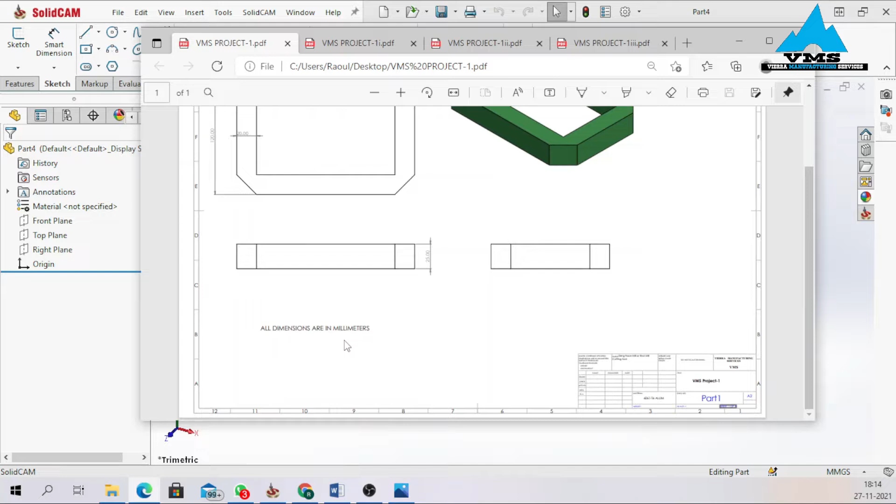Okay, so just click on File, New, Part. Let me just show you guys a drawing. We have about 4 different pages: page 1, page 2, page 3, page 4, up to the final drawing. We are on page 1, making sure all units are in millimeters, and we have a scale of 1 by 1. By the way, all of this will be made available for download.

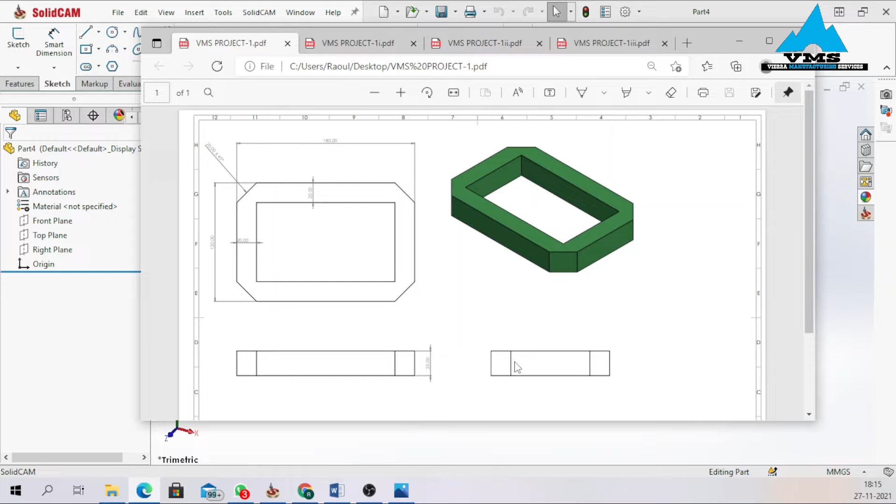So firstly guys, we are going to draw a rectangle of length 180 by 120, then offset it, put chamfers, and then extrude it. So 180 by 120, and make sure your units are in millimeters guys.

Okay, looking at the diagram, we notice that this is third angle representation. So this should be the top view, front view, and this is the side view. We are starting with the top view.

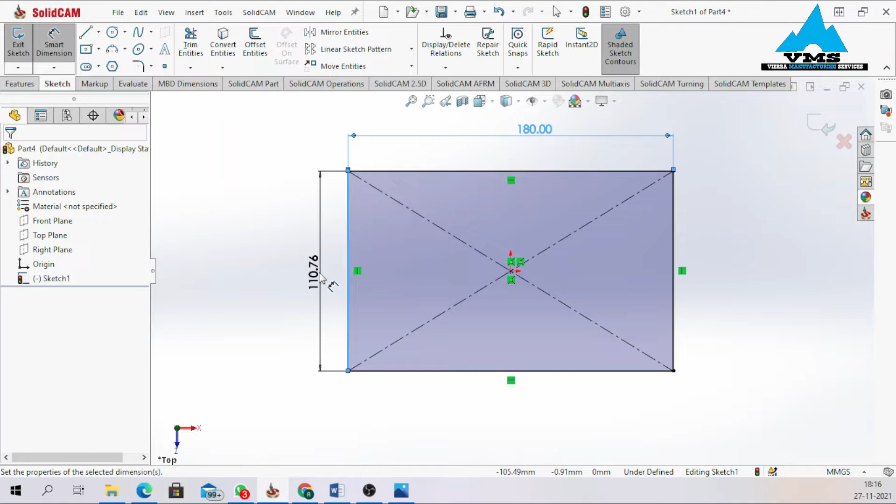Sketch, top, rectangle, center rectangle. Okay, just drag it off. Smart dimension, let's say 180 by 120.

Then offset, let's just select this. It's not selecting, okay, offset of 20 guys. If it's not selecting, select 1 by 1.

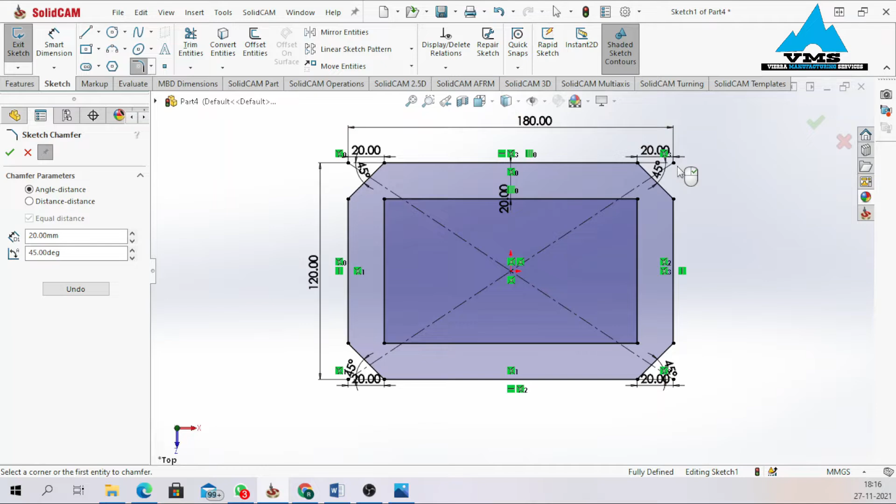All fine, so next thing is putting chamfer. Click on this arrow, chamfer. So the chamfer is angle distance of 20 with an angle of 45. So this edge and this edge, or simply these vertices and these vertices.

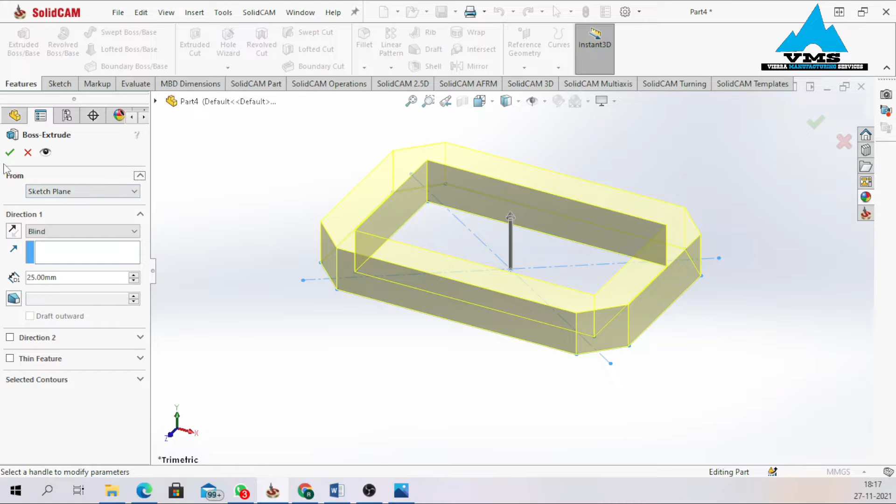Okay, looking at the diagram, we notice that it goes all through, so we have a height of 25. We are going to extrude this by 25. With the sketch selected, feature, extruded boss/base. We extrude it upward by 25. Okay, fine, so first sheet completed guys, beautifully made.

Okay, so next sheet. In the next sheet, what's new is we have this base and this particular extrusion. From here to here it's 2, and as you notice, everywhere is 2.

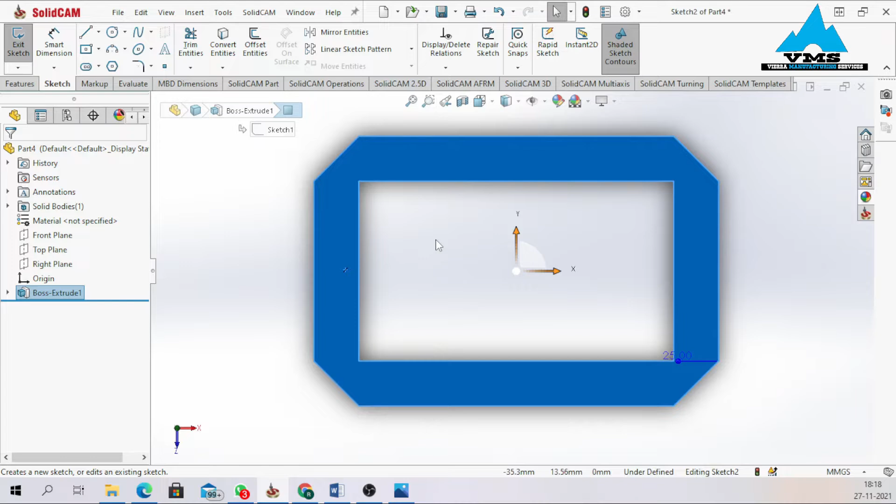So we are going to offset the inner circle, or the inner rectangle, by 2. Then we have a line from here to here of 10 and from here to here of 12. Okay, let's do this.

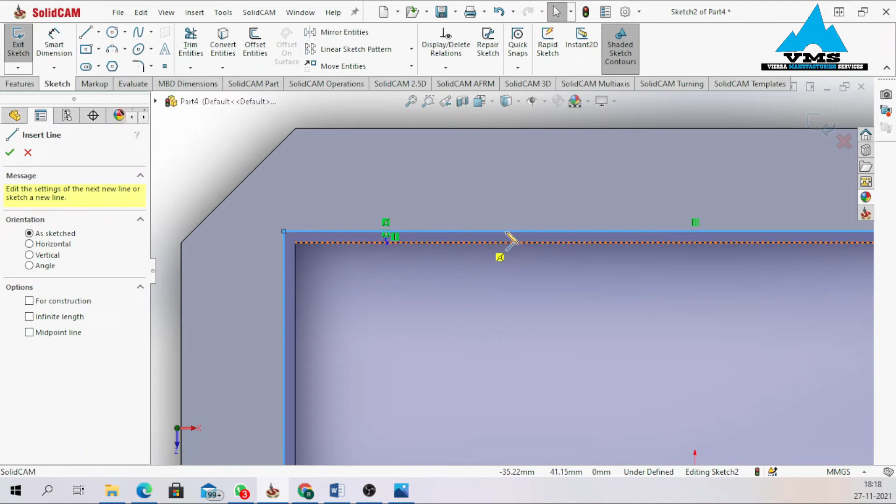Sketch at the top view. Okay, offset. One line. And okay, so the offset is 2, with 2 selected, okay fine.

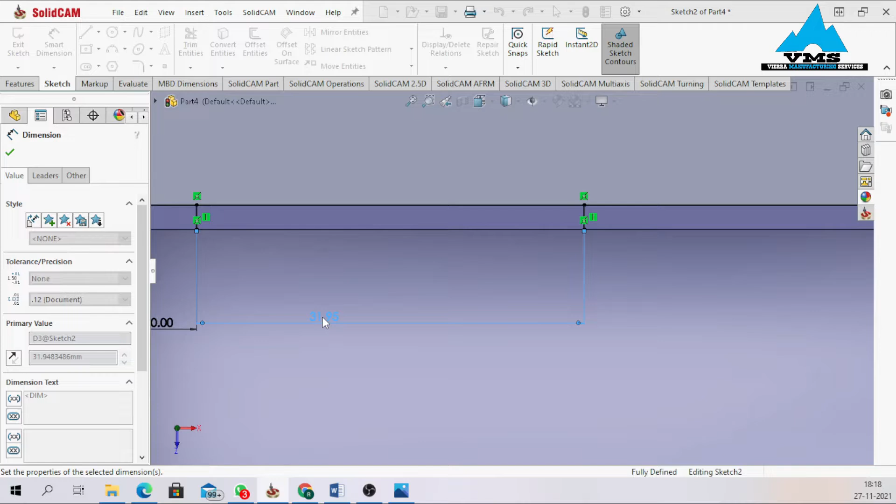Then we have a line over here. Repeat back the line command, and just put in any distance. Smart dimension, now from this line to this line is 10 mm. Next, this line to this line is 20 mm. Okay, all good.

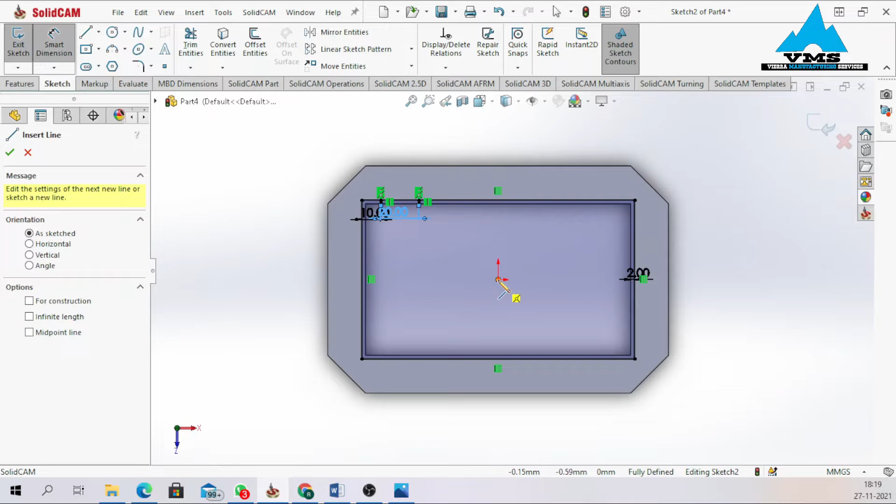So now these lines are equally on this side and on this side. Looking at the diagram, you notice that they are mirror images of each other, right? It's a mirror of this one and a mirror of this one.

So we have to put center lines. Just zoom it back, or control. Line over here, then click this arrow, center line, or you just come here, press on this line, draw back, center line, then you can add it here. Make sure the line is straight.

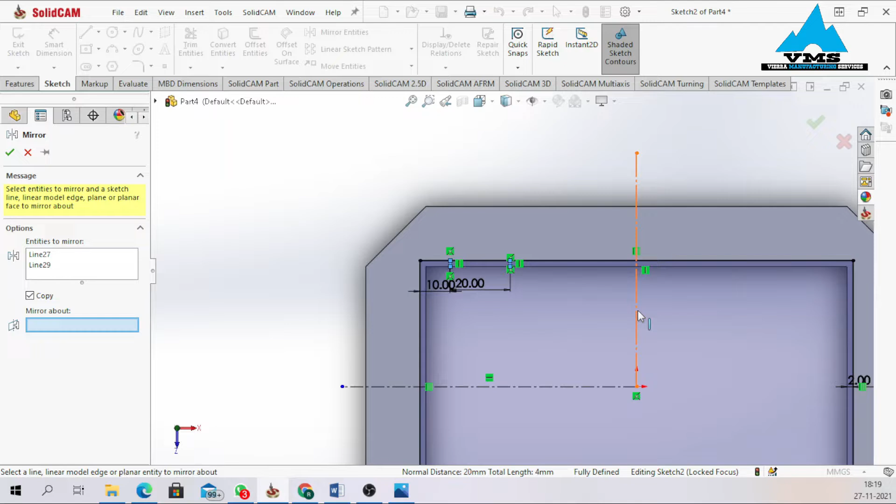So one thing you have to do is click on mirror entity, then select this line and this line, so you mirror about the y-axis. Again repeat the command with this selected, so you mirror about the x-axis.

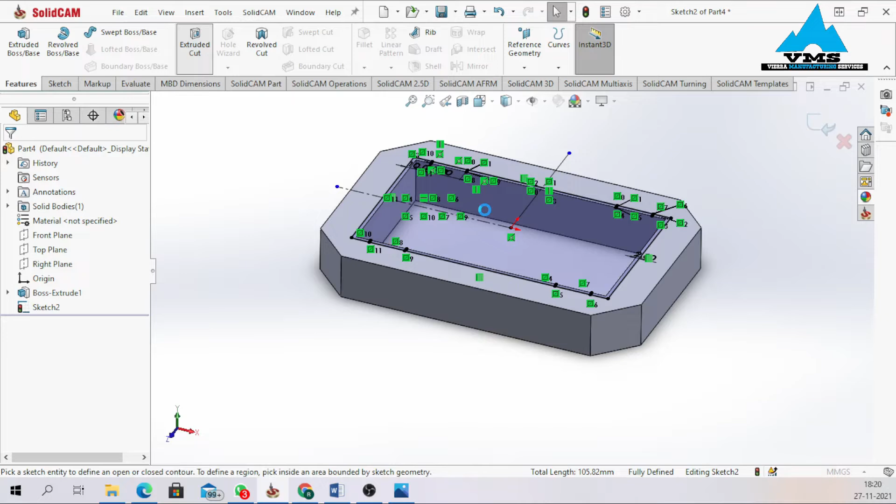So one thing we have to check equally is looking at the extrusion, we need to know how much it's been extruded. If you just go down, you see it's extruded all through. Even looking at the isometric view, you notice it's been extruded all through. Okay, fine, back to diagram.

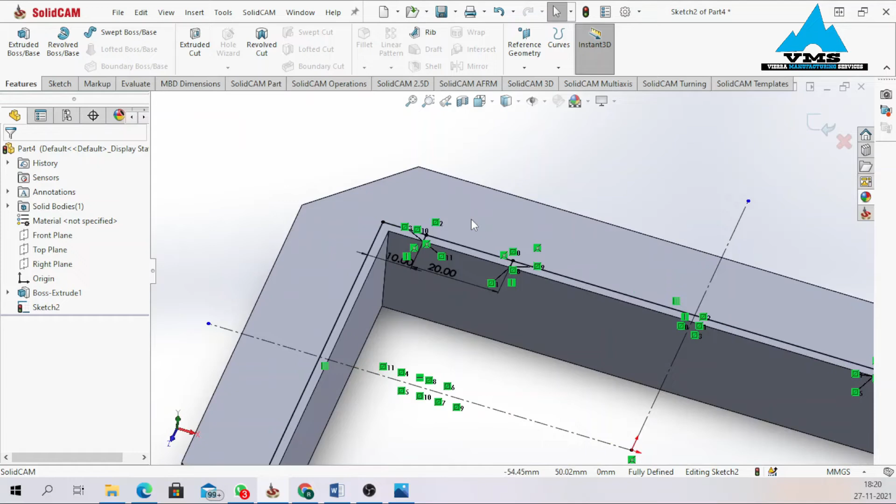Okay, so extrude cut. Can you notice, I'll select this part. Okay, there's a mistake guys, just a moment please. Looking at the diagram guys, it's 12, it's not 20. This is a mistake I did, sorry.

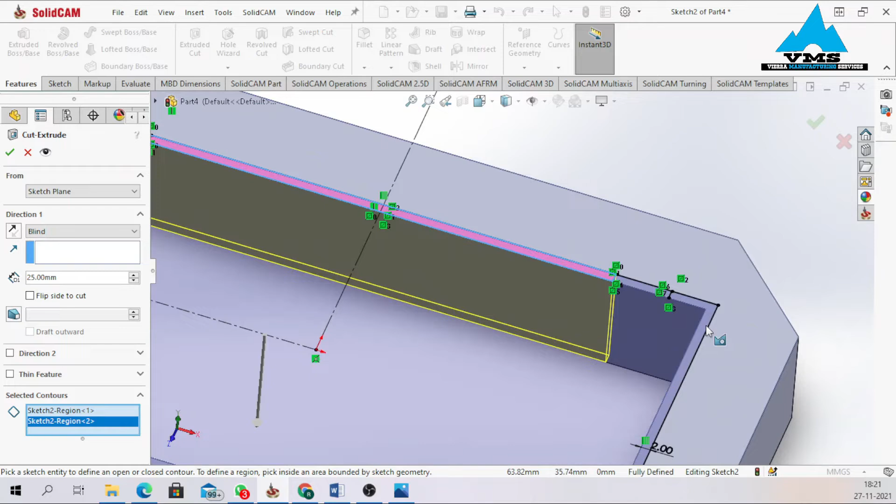So just zoom it, so smart dimension, we're going to put 12 mm. Since they are mirror images, all the others will equally be affected, so just by changing this one, it changes all. Okay, fine, so extrude cut now.

Okay, you select this, this part. This part I think is already selected, so it's all through. So we have to go a little bit more deep, so let's take that 25, let's say. Okay, good, so this is done.

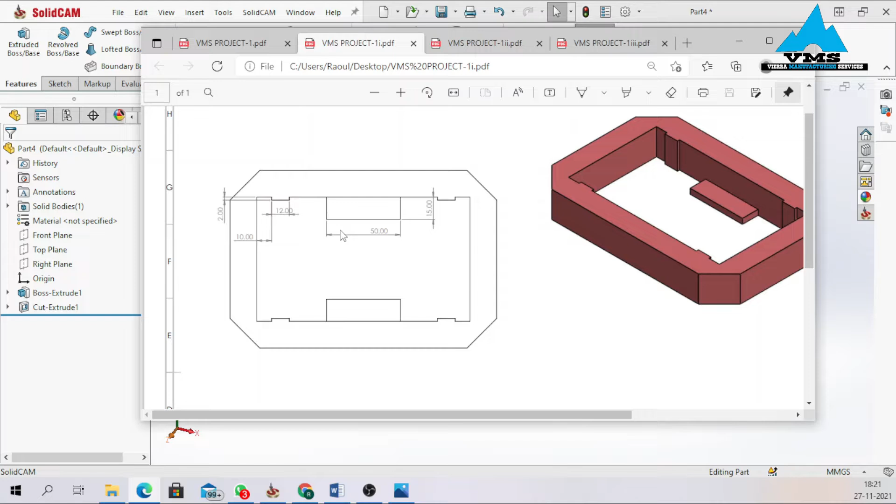So next we have to do this base. This is a third angle projection, so we are looking from bottom. So this is the bottom view right here.

Length of 50, width of 15, so 50 by 15, and extrusion of 5. There are 2 of them. So, 50 by 15.

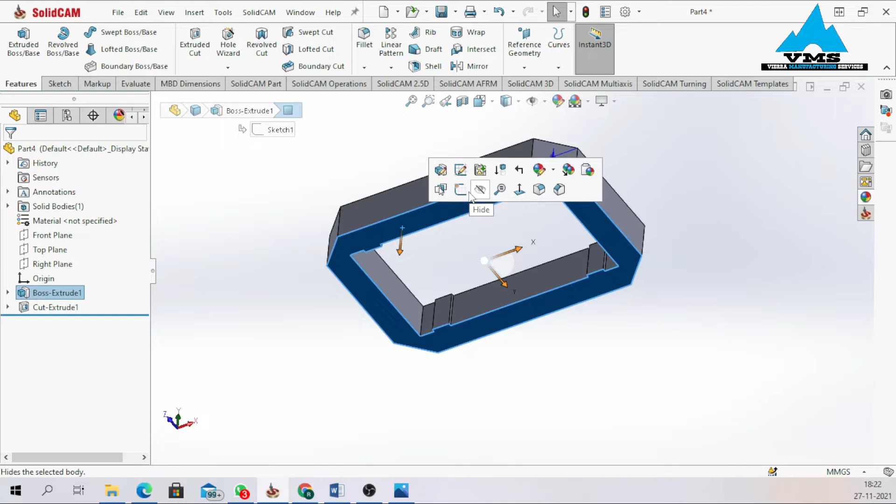So you go bottom view, sketch. Sorry, just cancel, discard. Okay, bottom view, sketch, okay fine. So here we are going to be using rectangle, but rather corner rectangle. So just select this corner, drag. Okay, all fine. So one thing you will do here, I'm just going to put center lines rapidly.

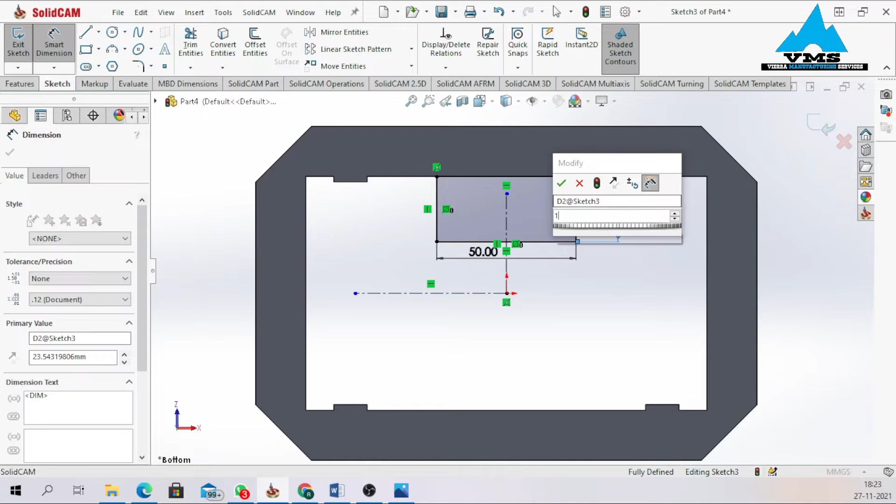Center line, okay, repeat back the function. Center line, okay, I'm going to select this line. I'm going to hold control, select this line. With control hold, I'm going to select the center line, and then I'm going to select symmetry at this edge. Symmetry, okay all fine. So it's, if I'm not mistaken, 50 by 15.

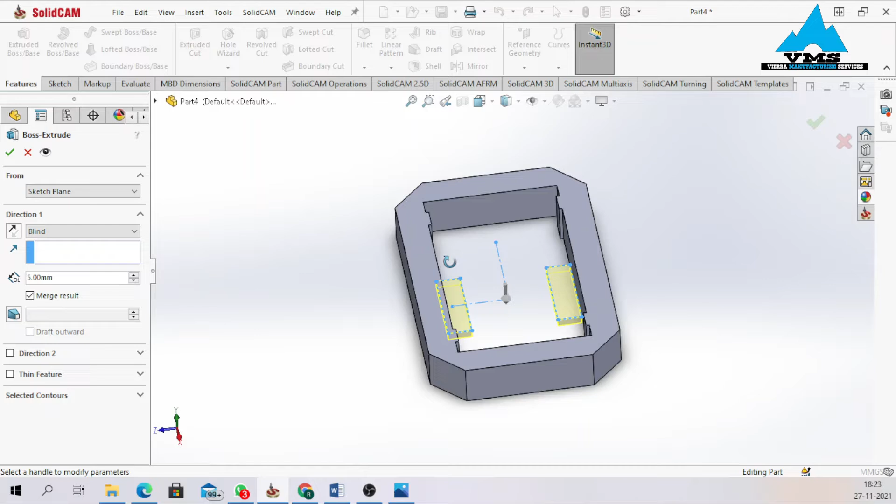Okay, all fine. So mirror entity, just select this, then mirror about x-axis. Okay, so now we are going to extrude by 5. So with sketch selected, of course, extrude boss, 5. Then reverse direction, guys, by clicking this arrow. Okay, it looks good now, okay fine.

Good, okay, so let's look what is next. Nothing new, I think we are done with this drawing. Okay, let's go to that page. Okay, look at the test page. We notice that we have this particular cut over here.

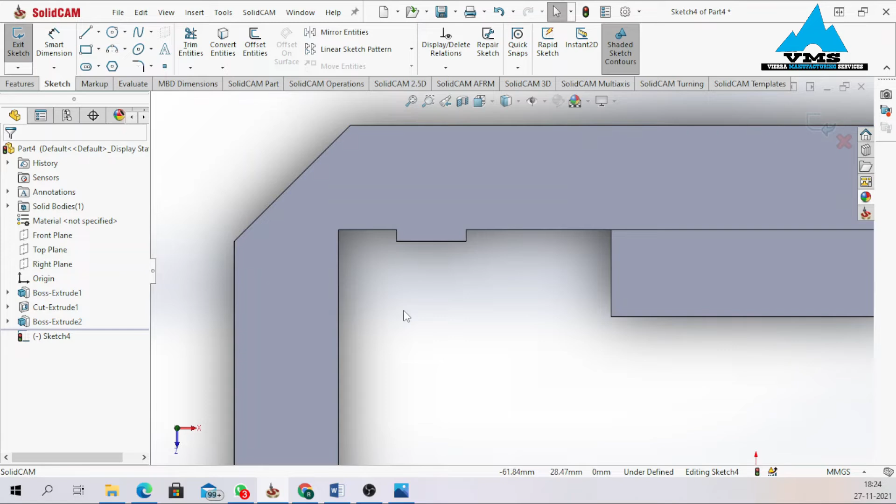So radius 9. Okay, we have chamfer, oh sorry, fillets. We have several fillets, then we have some cut art. So let's deal with this radius first here. Okay, so looking at it, it's been extruded all through equally, and it's at the four corners, right, of the part. Okay, let's just go back.

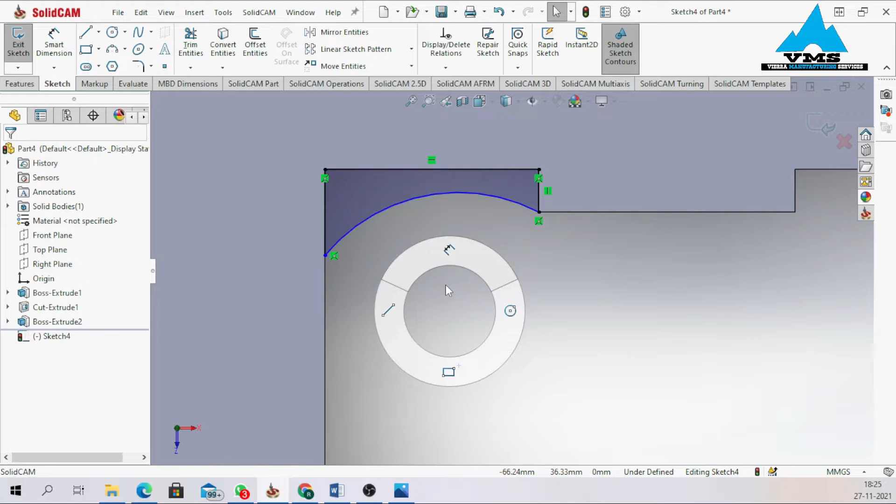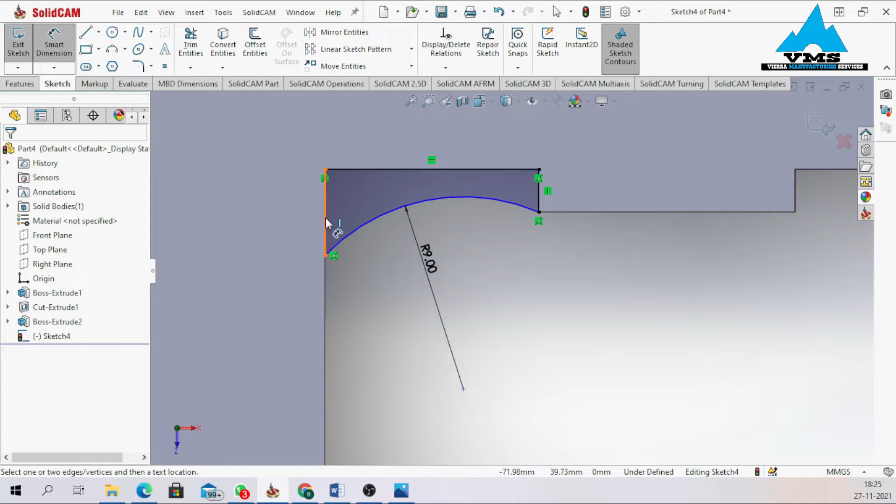Smart dimension with this selected, radius of 9. Okay, so now right now it's under defined, because you guys should know one thing: whenever solid sketch is blue, it means your drawing is not fully defined. So in order to make it fully defined, you have to define or add additional dimensions. Okay, so smart dimension, this particular dimension needs to be added. Unfortunately, it's not in the drawing, so let's just take 5.13. Okay, so now it's fully defined.

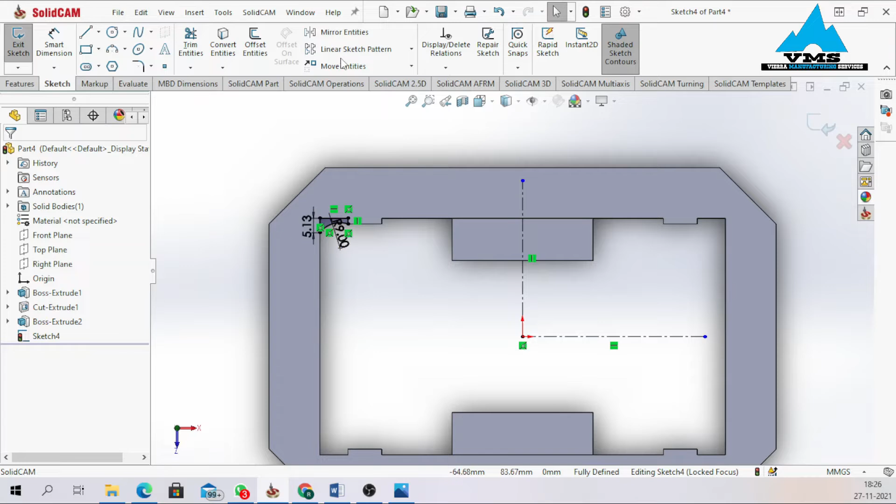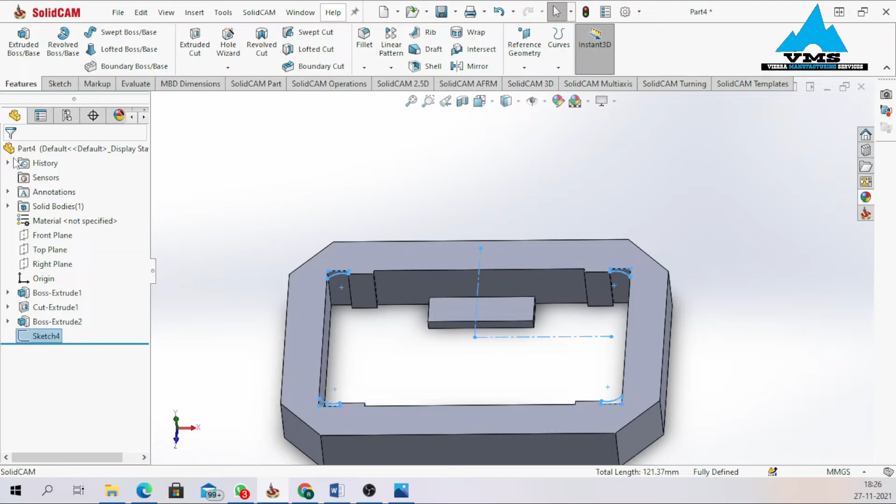So center lines, make sure it's straight. Okay, so we are going to mirror this entity about this line, repeat back the function, select the sketch, mirror about x-axis.

Okay, and with sketch selected, extrude boss. Now we are going to extrude it up to this end, so let's just say up to vertex. Okay, the vertex point, I'm going to use this particular dot, that's my vertex point. Okay, fine. So here we are, let's see what is next.

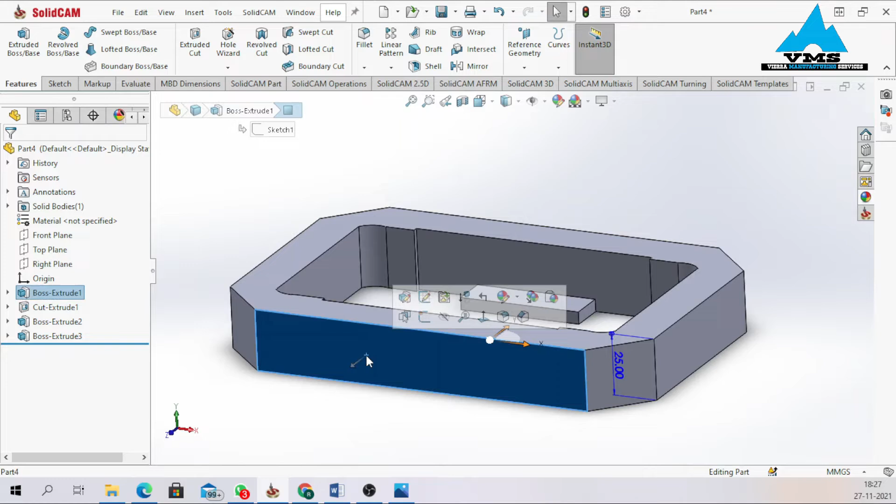So we did this, so let's speak about this front view, guys. Looking at the diagram, front view. Okay, looking at the rectangle here, we have length of 80 and width of 20, and if you just follow this diagram, you notice that we have an extrusion of 10, so 80 by 20. Okay, let's do this first.

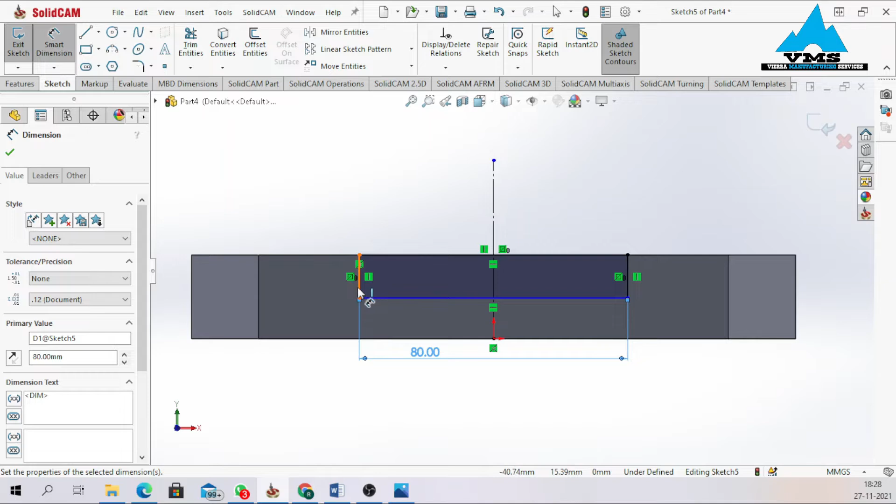Front view, right, okay, this is the front view. Sketch. Okay, center rectangle, right, corner rectangle. Okay, let's be fast a little bit, guys. We select this, okay, line. It needs to be a center line, so make it center. Okay, by selecting this line, pressing control or holding control, this line and the center line, then symmetry.

80, I think it's 80 by 20, guys. Hope I'm not mistaken, let's just check it first. Okay, 80 by 20, extrusion of 10, fine. Okay, so it's fully defined. So features, extruded cut, 10. Okay, good, so we obtain this.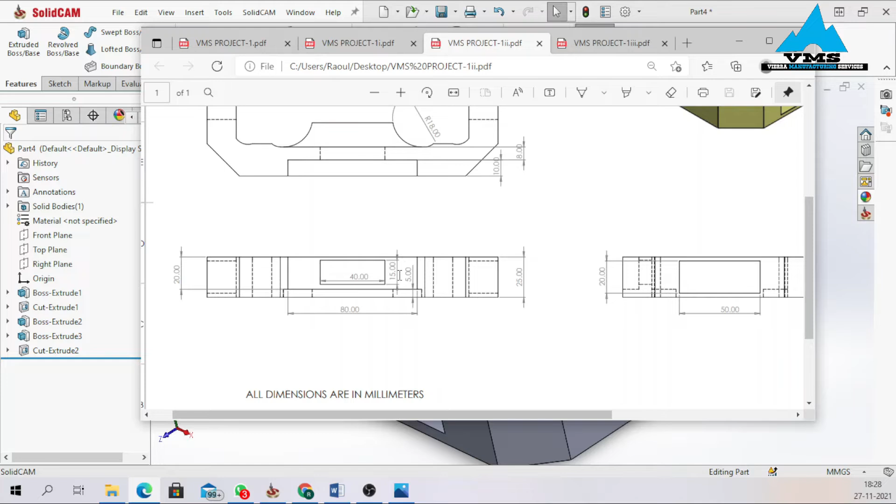So what's next is this inner cut. So looking at the diagram here, this inner cut equally at the center, rectangle, 40 length, so 40 by 15, extrusion of 40 by 15. Okay, fine. So with this sketch,

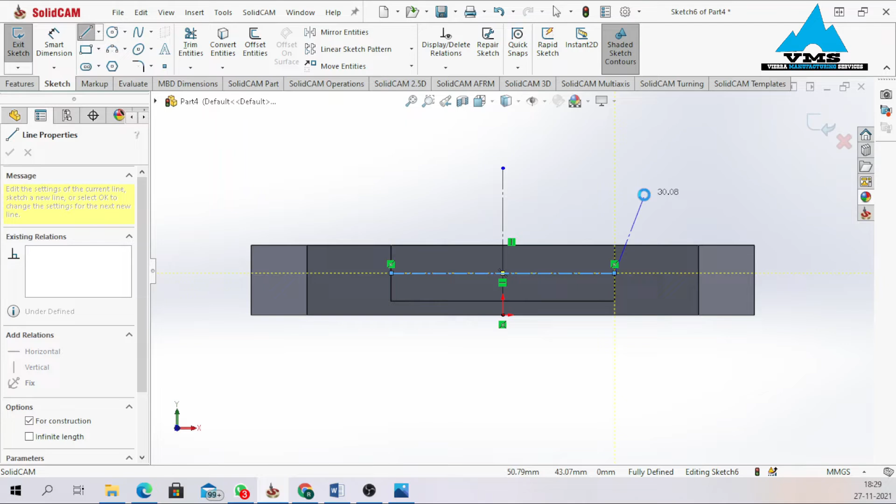Okay, so center line first, guys. Line, center line. You can just take it from here, center. Just find a midpoint here. Okay, fine.

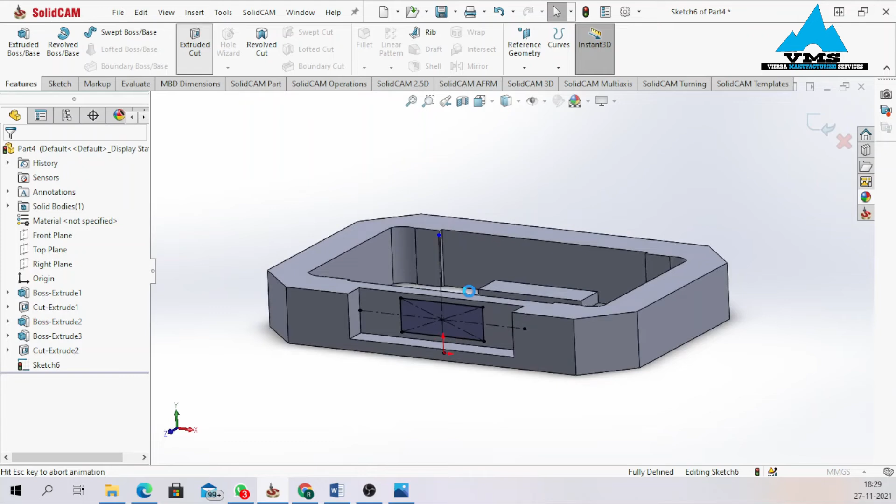So center rectangle. Okay, so it's 40 by 15. Okay, good, extrusion of 8, so extrude cut, 8. Okay, good. Okay, that's looking good, okay, what's next?

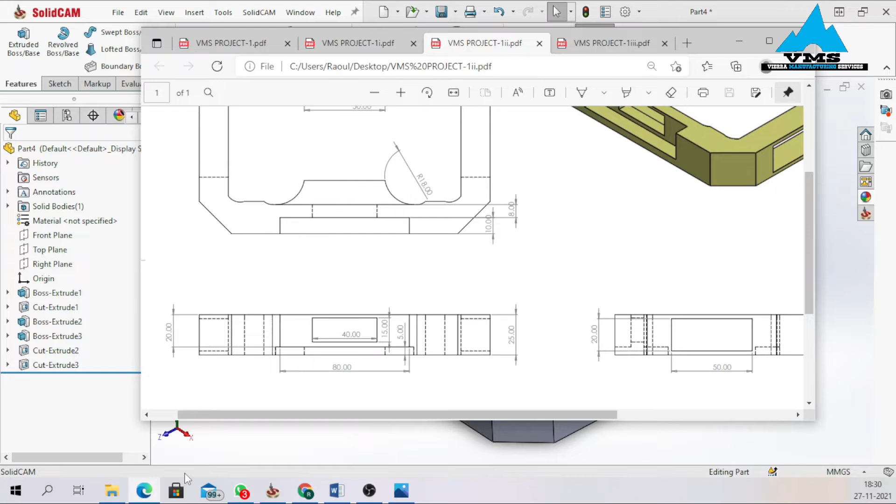Front view done. Looking at the side view, we have this cut at the side view. We have a center rectangle, just put this down. 50 length, 20, so 50 by 20. And if you just follow it, it's extruded all through, guys. Just follow it, it's extruded all through. So 50 by 20. Just a moment, okay.

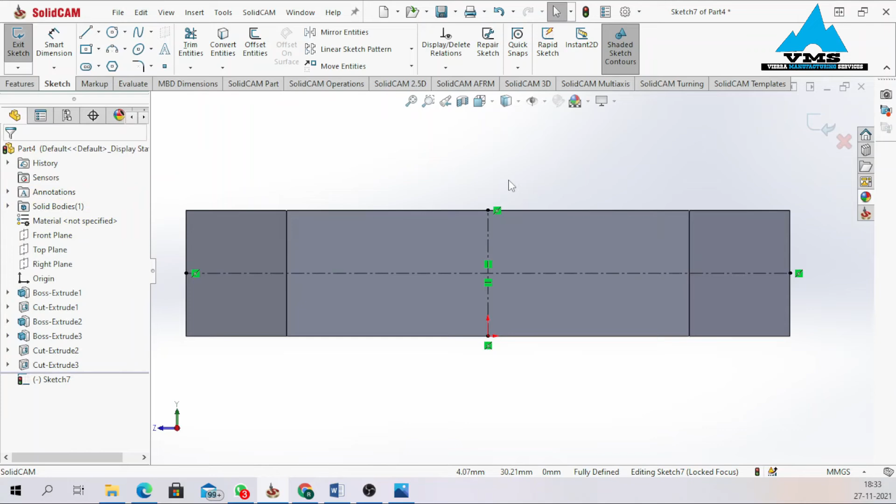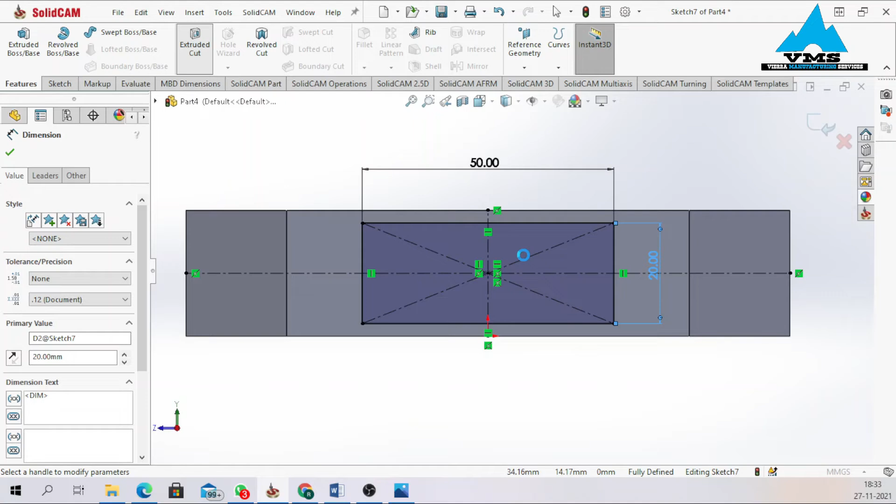Okay, guys. So side view. Just click this. Sketch. Okay, you can just add some center lines. Just cancel this. Center line directly. Yeah, okay, fine. Select center. Okay, fine. So rectangle, center rectangle. Just drag, click. It's my dimension. Let me just check dimension again, guys. It's 50 by 20, okay. 50 by 20.

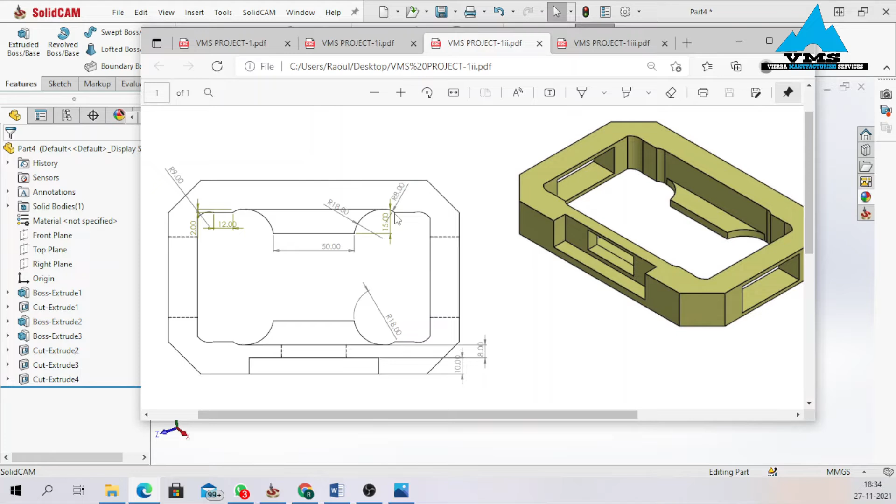And we have to extrude it all through. Okay, fine. Extrude cut. All through. Okay, fine. So you see it goes all through. Okay, good. So let's see what's next. Looking at the diagram. Okay, we have done this. We have done this. I can see this fillet, one fillet. This fillet is of radius 18, and I can equally see a fillet at this edge of radius 8. Okay, I think that's all. Okay, let's do that.

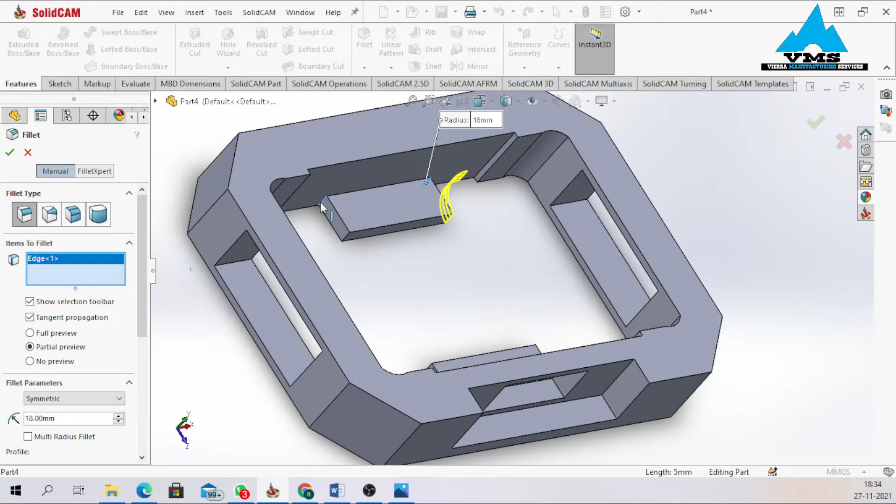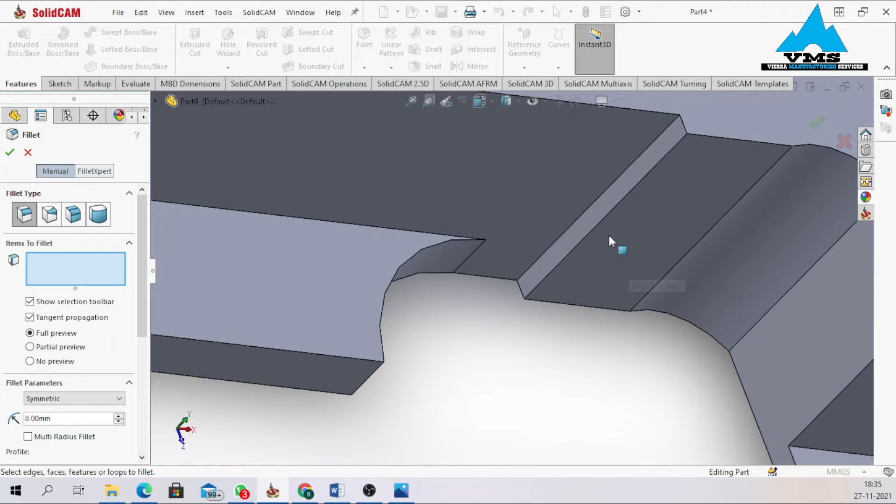Okay, fillet, making sure the radius is 18. Okay, this point, good. This point. If you want to preview fully, just click on full preview. Okay, so you notice that. So this point and this point. Oh, a mistake. Just delete this. Okay, fine. So 18. Okay, all good.

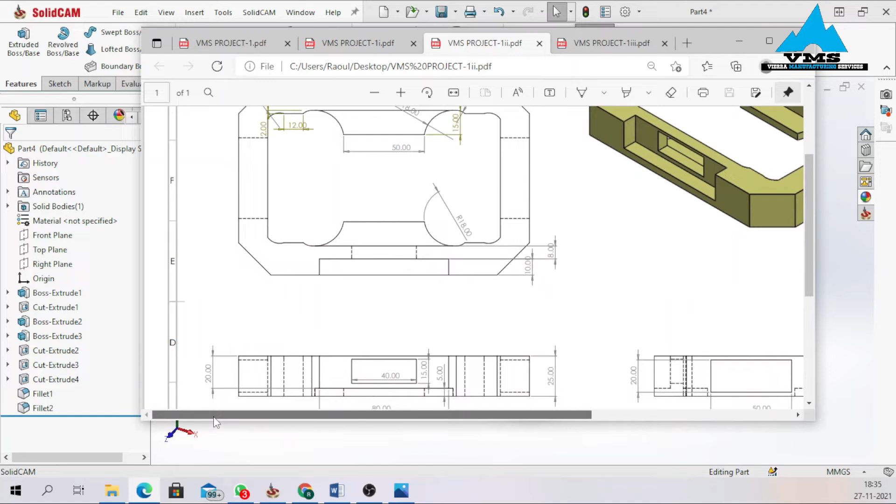So next thing, we have another fillet, radius of 8. Okay, making sure it's at this edge. Okay, 2. So we have about 4 to select. Let me just check. 3 and 4. Okay, good. Okay, perfect. Okay, we are almost done. Let me just check the diagram. Okay, I think that's it, guys. Just check out the isometric view. I think we are done with this.

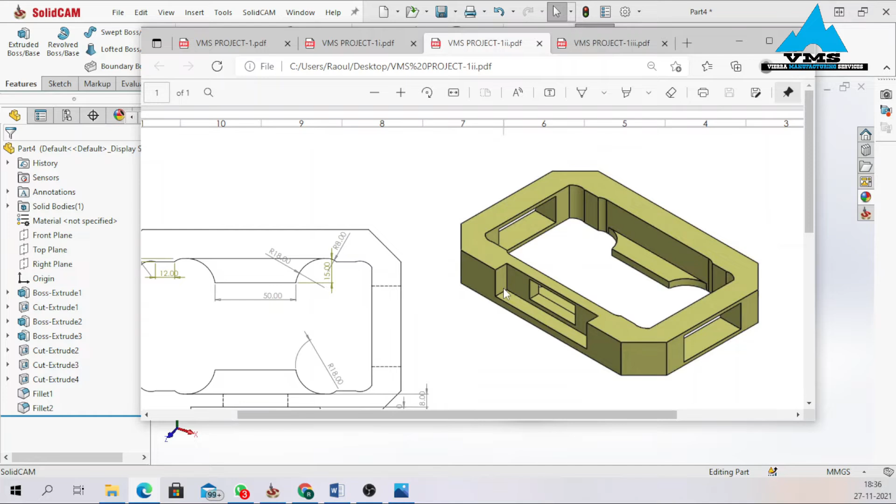Okay, so let's dive into the last part. Okay, so this is the final drawing, guys. I hope you guys are excited. This is the final drawing, almost done. So what's new in this drawing? We have holes at the top view. Front view, we have holes, so many holes, and equally side view. What's new? Let's see, holes, that's new. Okay, these are equally fillets, right, guys? If you compare with this drawing, we have new fillets added here. Okay, so let's just do the fillets directly.

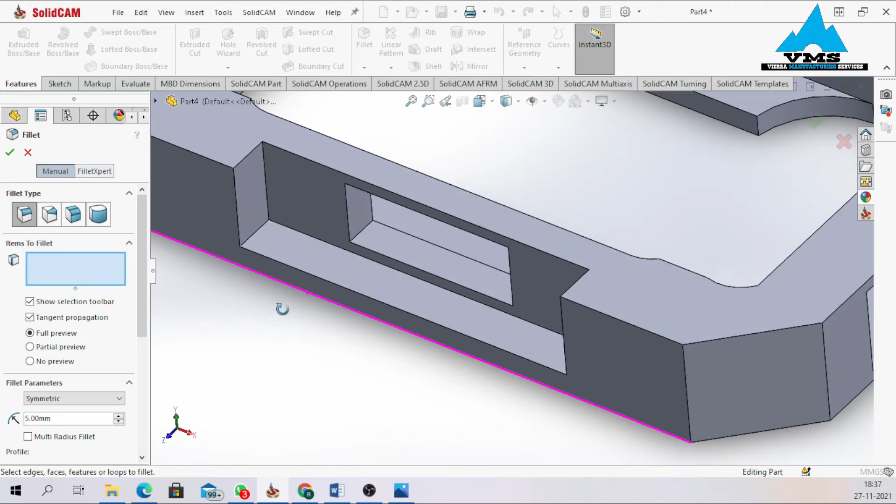Okay, so over here we have fillet of 5, fillet of 5, fillet of 5 all over the views. Okay, 5, 5, 5, 5, 5, 5. I think that's pretty much it. Just check something. Okay, it's it, right? Fillet of 5 all over. Okay, so let's dive into it. Okay, fillet command, making sure the radius should be 5. Full preview is selected, just click enter. Okay, 1, so 2, so making sure you select totally all.

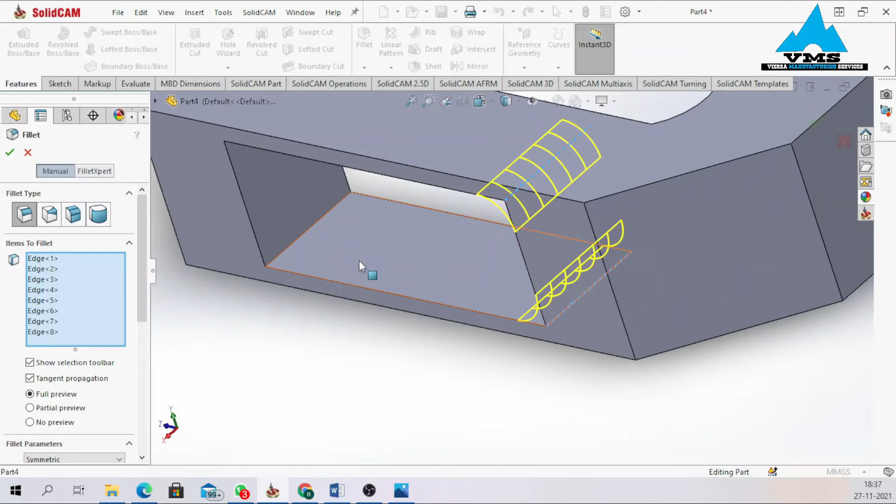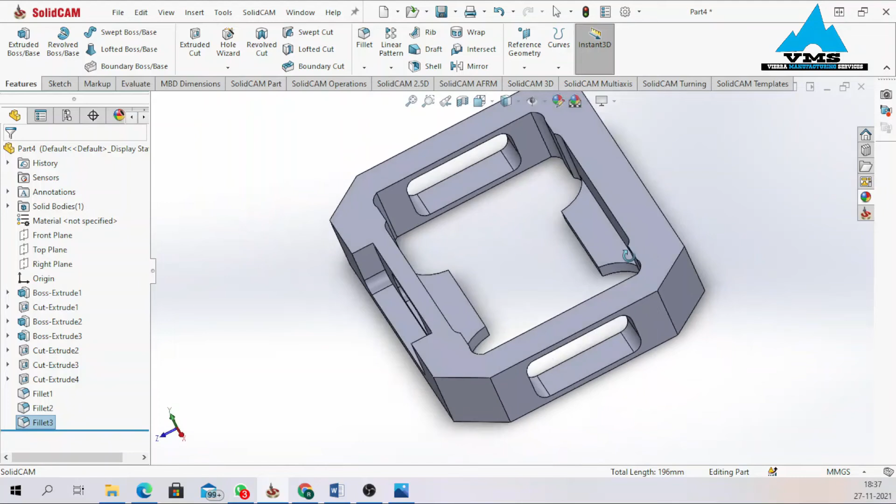Okay, fine. So go to the other side. Okay, good. Okay, fine. I think it's done. Boom. Pretty good. The fillets make it look good, nice. Okay, guys, good. Okay, so let's check out the diagram now. Now we are going to go top view. We are going to be trying to make these holes.

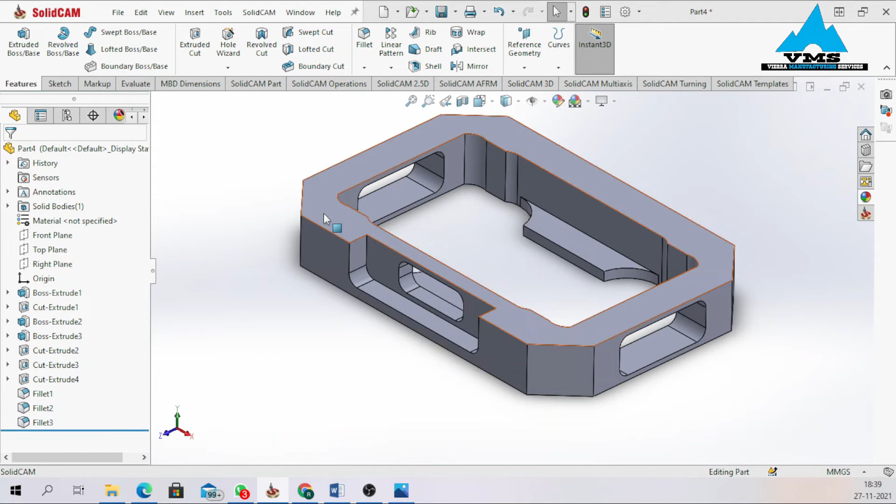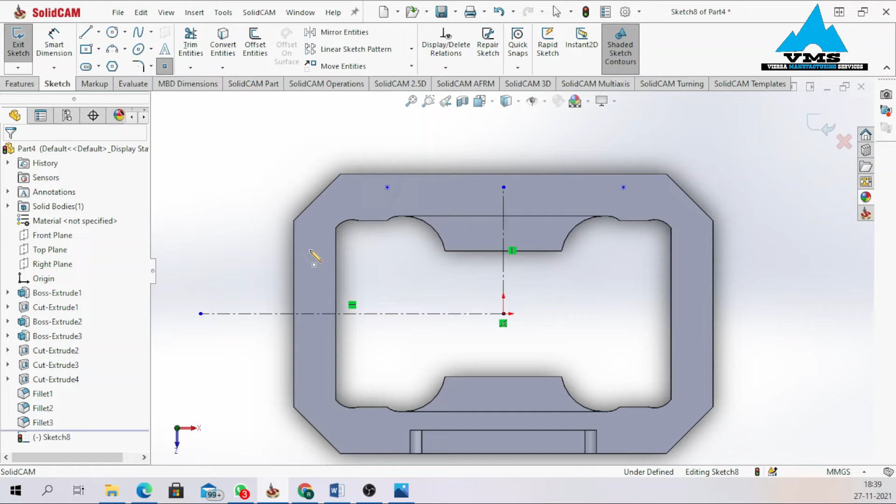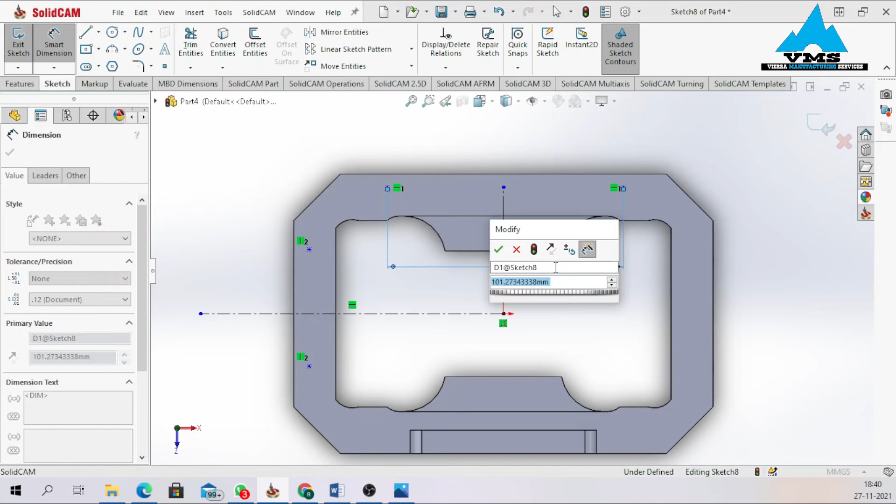Top view, so from this point to this point should be 108 at a distance of 8, and then 68 at a distance of 8. Okay, so let's go top view, sketch. Okay, one thing, center line. Just come here, click on point, just put it anywhere. Okay, fine. Okay, pretty good. So point, select this point, hold control and select this point, make horizontal, select this point, hold control, select this particular point, make vertical.

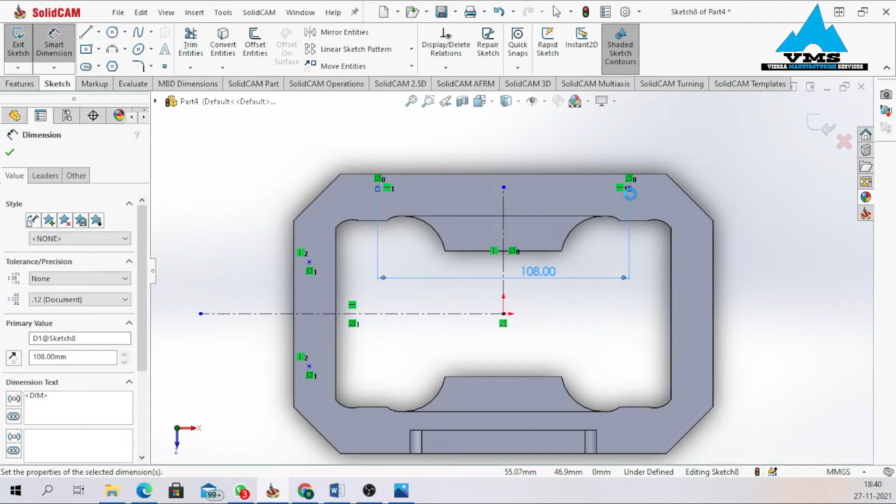Okay, all good. So this point, 108. One thing, guys, please just cancel this dimension. We need to do something first. So let's select this point, while holding control, and the center line. So make symmetry, very important. This point, control, this point, center line, make symmetry. Okay, fine. So smart dimension from this point to this point, we have 108. From this point to this line, we got 8.

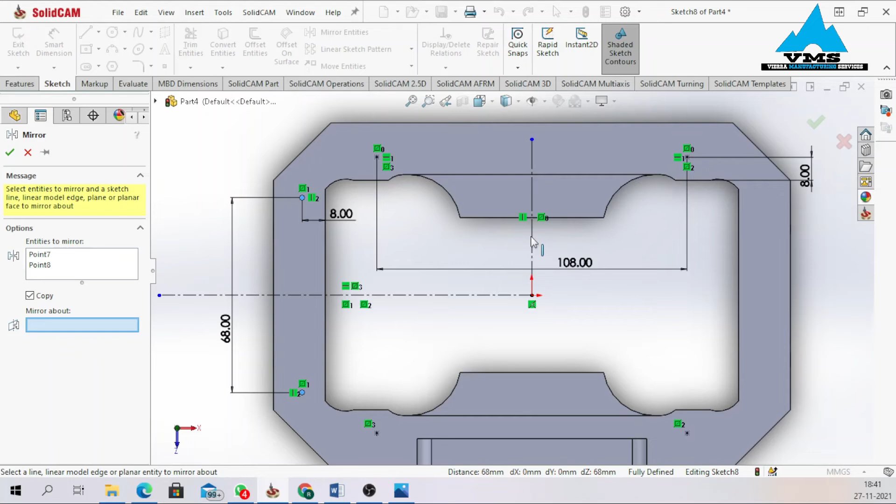So I think from this one to here it's 68. Let me just check it first. Okay, it's 68, right? Okay, from here to here 68, and then from here to here at a distance of 8. Okay, good. Okay, so mirror entity, this point, mirror about x-axis. Good. Repeat command, this point and this point, mirror about y-axis. Okay, fine.

Okay, so looking at the specification, guys, we have tap hole, M8, depth of 11. Okay, so just end sketch first. You have to end sketch or the hole wizard doesn't appear. Okay, so come to features, hole wizard.

This first one is counterbore, the second one countersink. This is hole, to just make normal holes. This is tap hole, so we are going to select straight tap, standard DIN, type tap hole. So we find M8 times 1. Let's go down. M8 times 1. Okay, end condition blind.

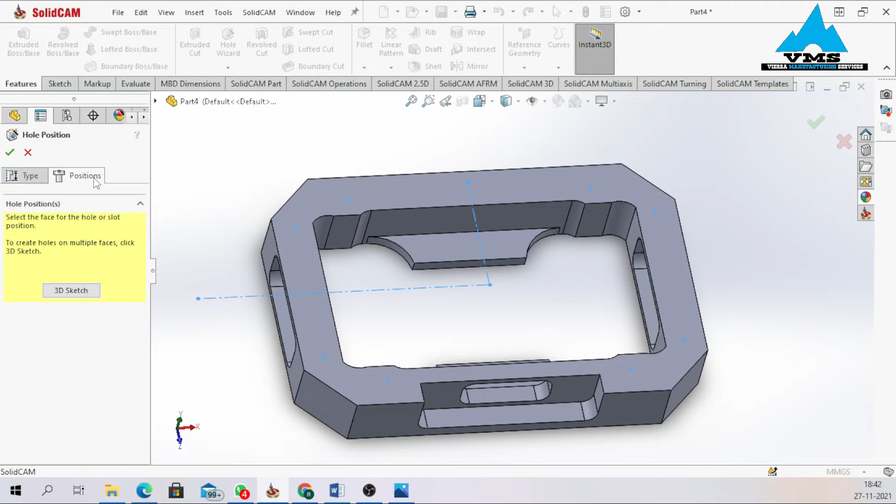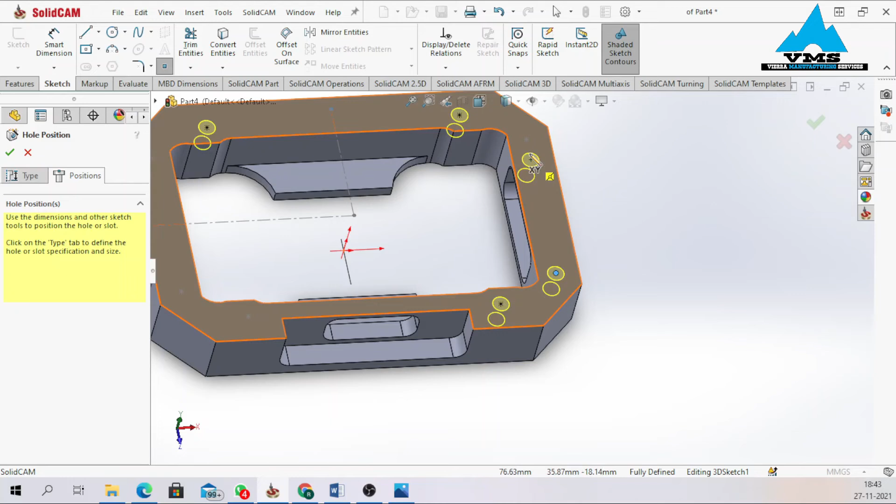We are going 11 downward. Okay, fine. Position. 3D sketch selected. Good. So just select the dots. Dot selected. This dot selected, fine. This one selected. This one selected too.

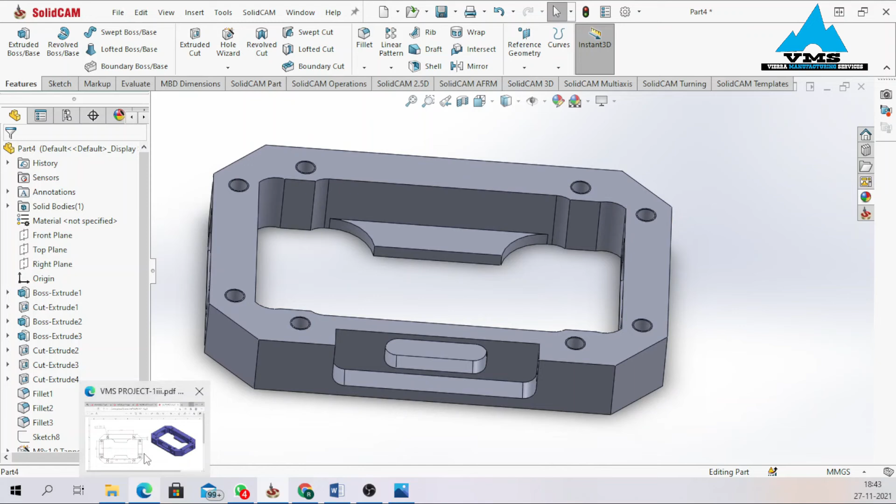Okay, I think it's fine. 1, 2, 3, 4, 5, 6. Good. So you just select the sketch, right click, then select hide sketch. So you hide this sketch. As you notice, we have one circle and then an outer circle. So this is the chamfer it makes. Good. So let's see what's next.

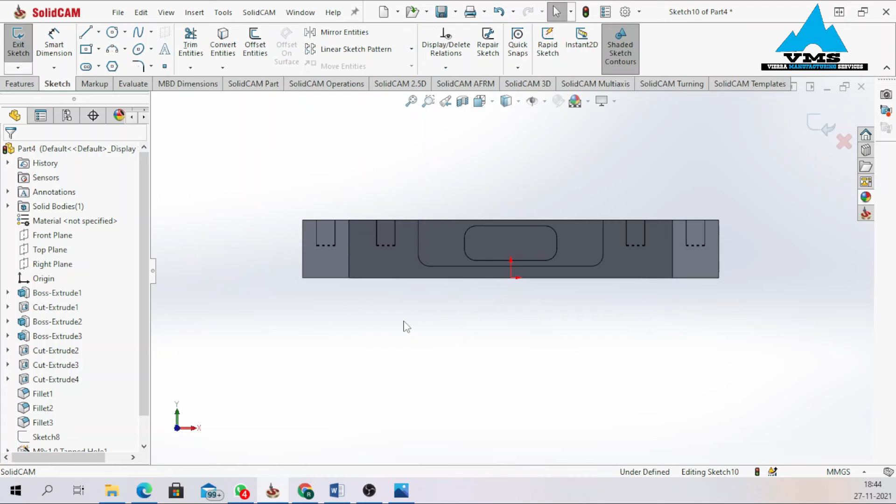So we go top view. We already have a hole at top view. It's 2 holes, 2 times 10 dia through all. So this is a simple hole. There are 2 of them. Looking at the hole position, we go front view. It's at the center, right? And at the distance of 35 from the edge. Let's do it. It's 10. So front view, sketch.

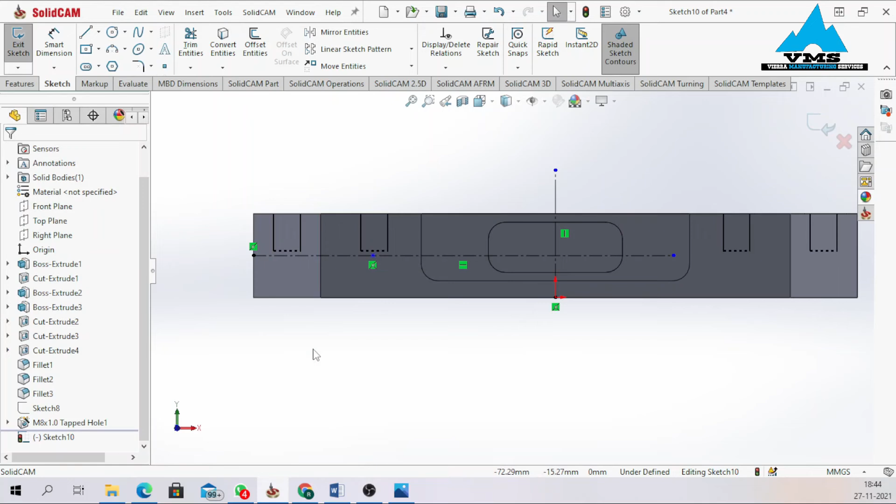Let me prepare my mirror, center line. Point. Another center line. Just end here. You can just put the point directly on the center line. So the distance from this point to the edge is 35. It's fully defined, right? So mirror entity, this point selected, mirror about the center line. Okay, fine. So this is done.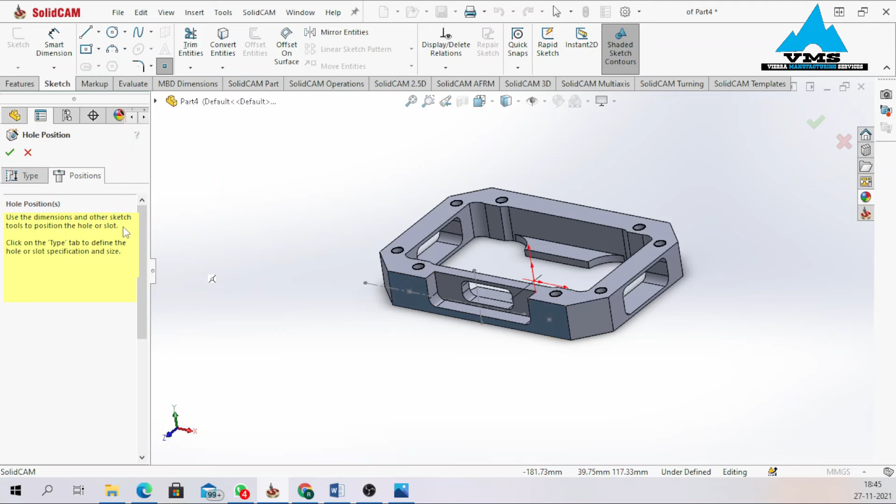So it's dia of 10 through all, so it's a normal hole. So we click on hole and see type. Now we have a drill hole. Drill size, dia of 10. Okay, 10.0. Through all. Position, 3D sketch. So we select this point. This seems to be an issue. Let me just select this point. Good. And this point, so it goes all through as you notice. So we are almost done.

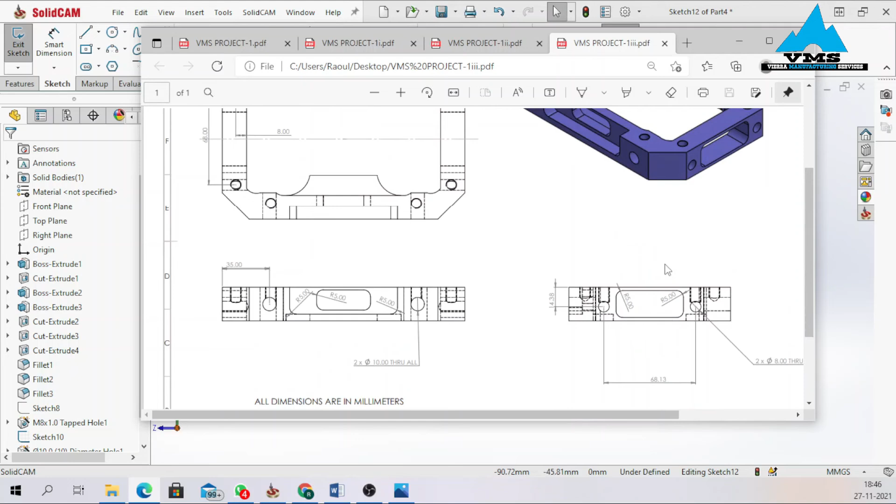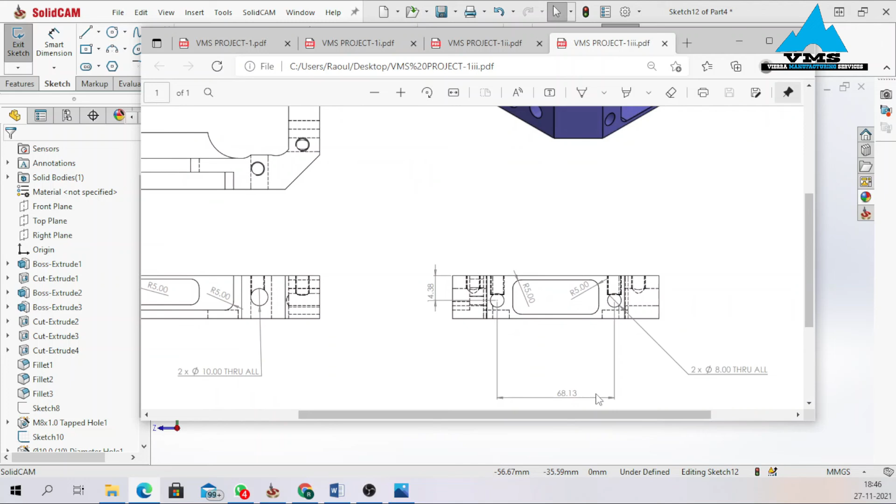So we are left with this side view. Sketch. Let's check out the diagram. Looking at it, the circle is not at the center, and it's at a distance 68.13 apart and 14.38, and it's through all. Look at dimension. Through all, good. So 68.13 and 14.38. Let us select center line first.

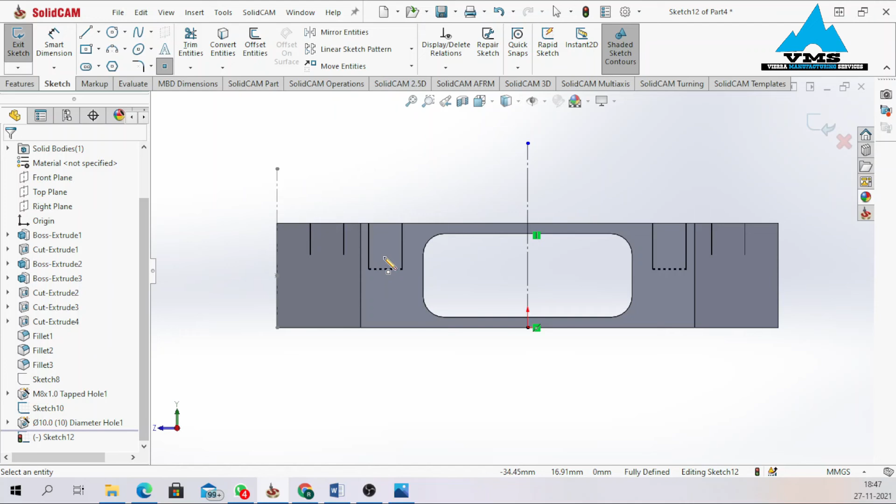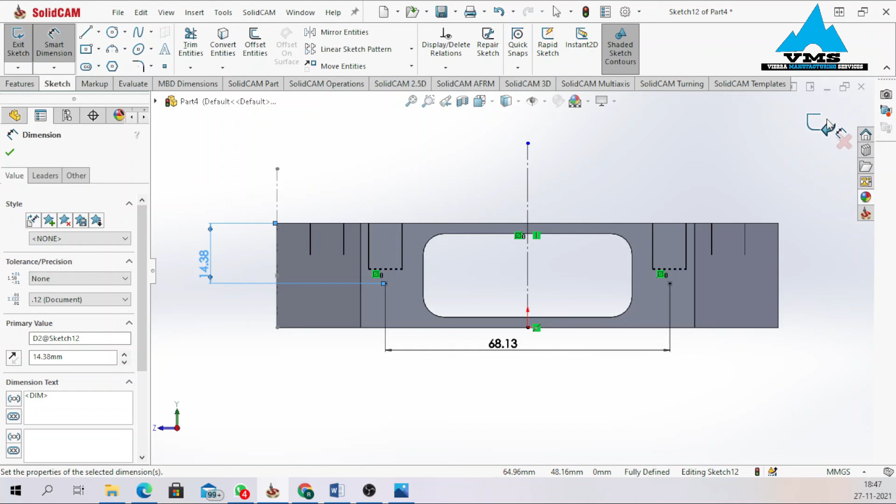Make sure they're straight, so vertical. Constraint. Let's take a point. Just put dot here. With this selected, control, this selected, vertical line, make symmetric. Then from here to here, I think it's 68. Let me check. 68.13. Good. And the other is 14.38. Good. So close sketch.

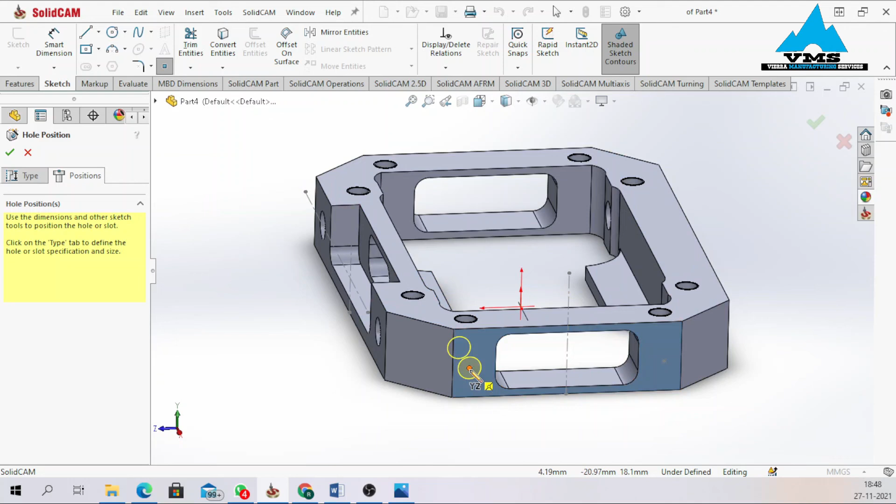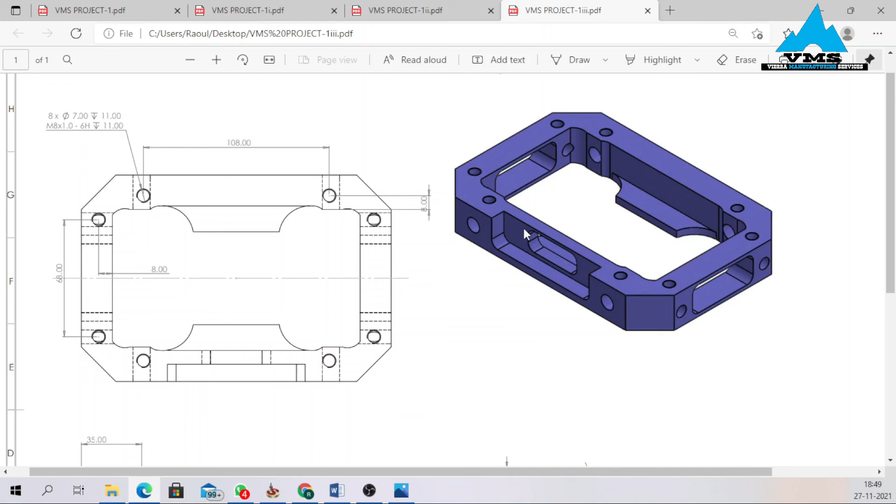So it's 2 holes, a normal hole, dia of 8, through all. Hole already selected, right? Drill size, we change this 10 to 8. Through all. Position, 3D sketch. This point and this point. All good. Almost done, guys. It looks pretty good. Let me just increase this. Looking at the isometric view, all looks fine.

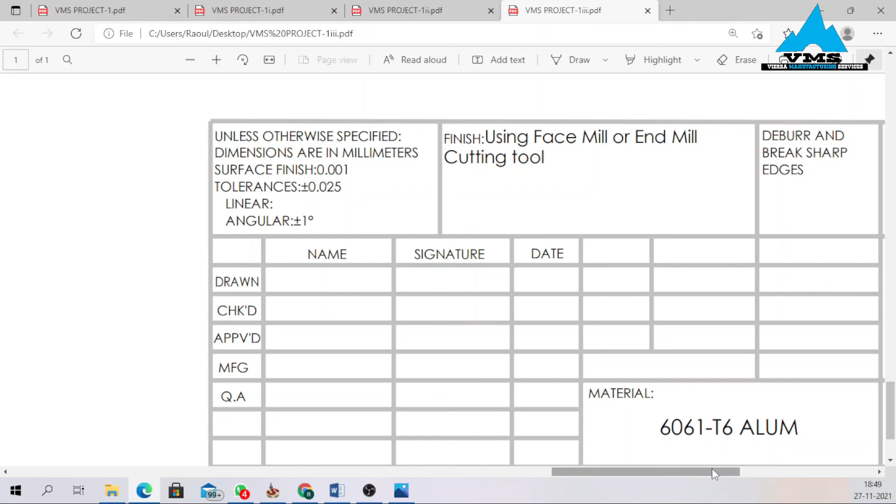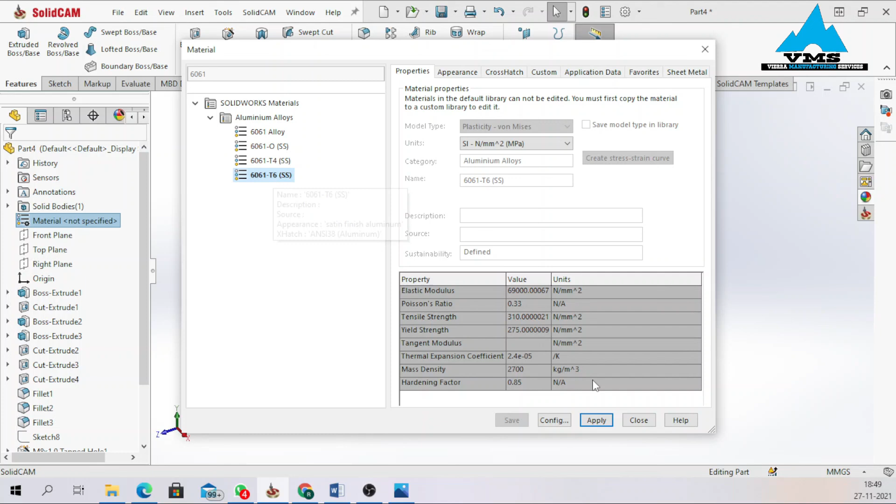One more thing. Looking at the bill of material, it's 6061 aluminium. So we have to select the material. Come over here, material, right click, edit material. Just write 6061 T6, selected, aluminum alloy, T6, then apply. It's pretty good.

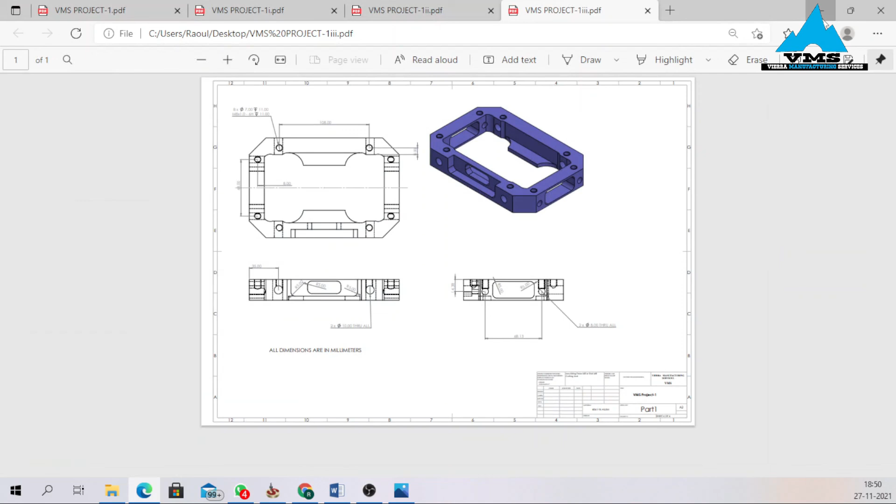Let's speak about the color. Click on the body, then appearance, body. I think the color is kind of blue. Let me check. Yeah, kind of purple blue. Let's save this. So this is it, pretty good. We are done with the VMS project 1.

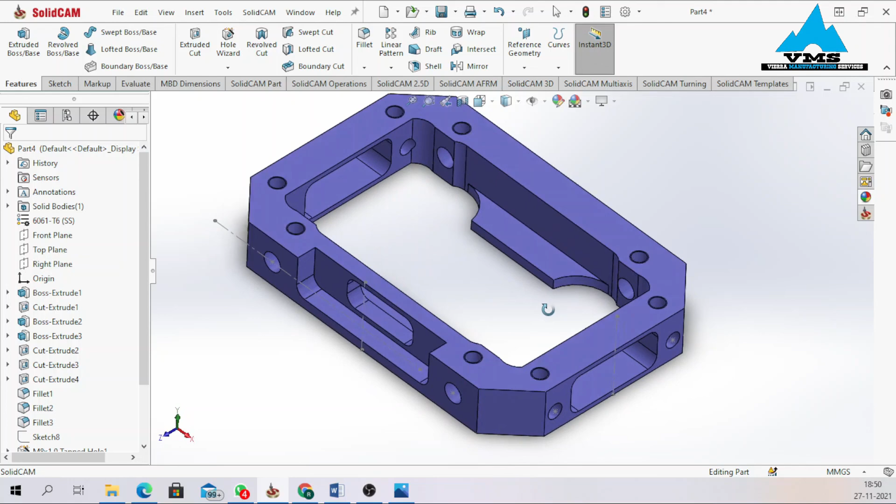In the next tutorial, we are going to speak about how we can generate M and G codes, or how we can convert this design part into programmable codes that can be understood by CNC controllers.